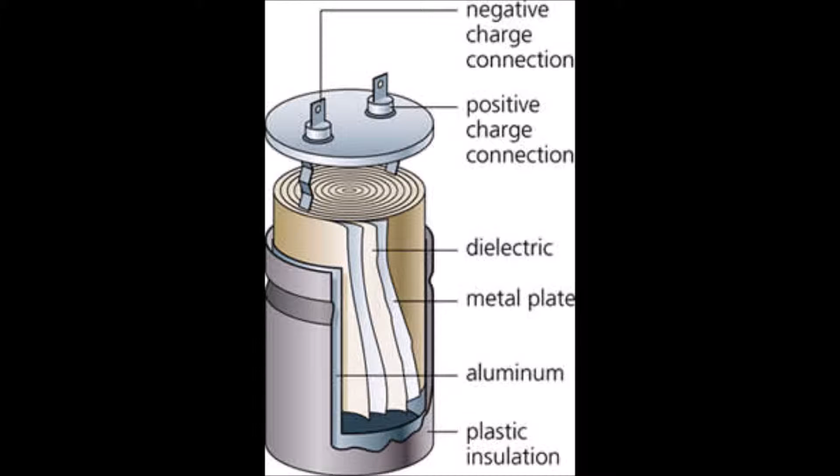Capacitors, the electrostatic battery. Capacitors store energy in an electrostatic field rather than in chemical form. They consist of two electrodes, plates of opposite polarity separated by a dielectric or electrolyte. The capacitor is charged by applying a voltage across the terminals, which causes positive and negative charge to migrate to the surface of the electrode of opposite polarity.

Heat, the thermal battery. There are two basic types of direct conversion thermal batteries: thermocouple batteries. The system is not energy efficient and is only suitable for low power applications.

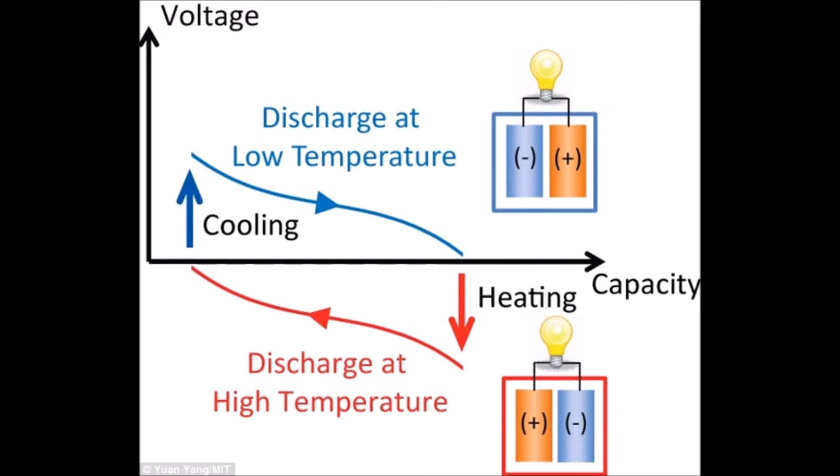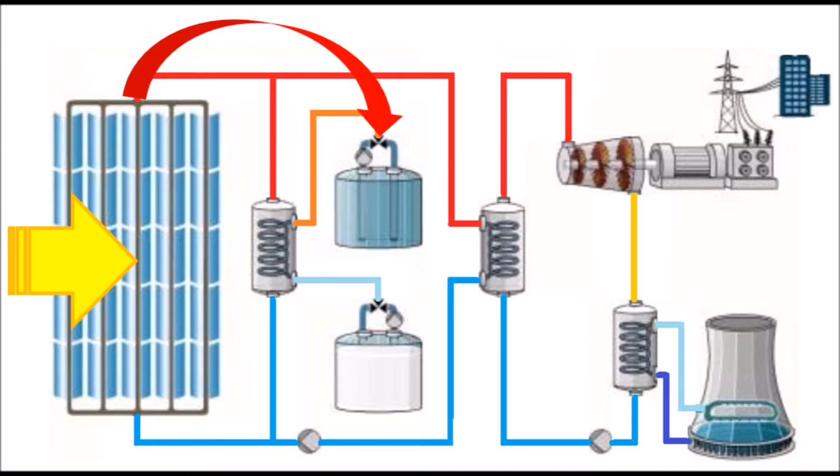AMTEC batteries, alkali metal thermal electric converter. They use a high temperature metallic vapor working fluid. A solid electrolyte separates the electron flow from the ion flow, which gives up its energy to the electrons passing through an external load. Energy conversion efficiency is about 4 times better than thermocouple batteries, which makes them more suitable for RTG batteries.

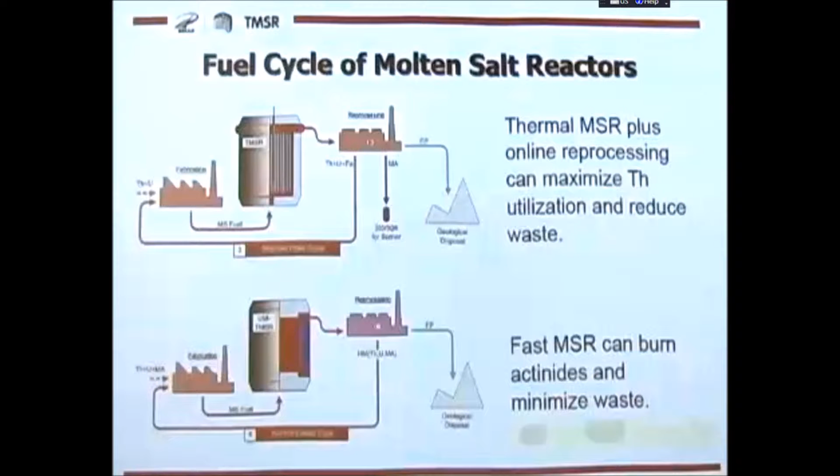Molten salt, a thermal battery. The molten salt battery is designed to capture thermal energy from thermal solar arrays and release it overnight when the sun is not shining, to generate steam for driving a conventional steam generator, and so maintain the energy supply to consumers. But today it doesn't get high uptake.

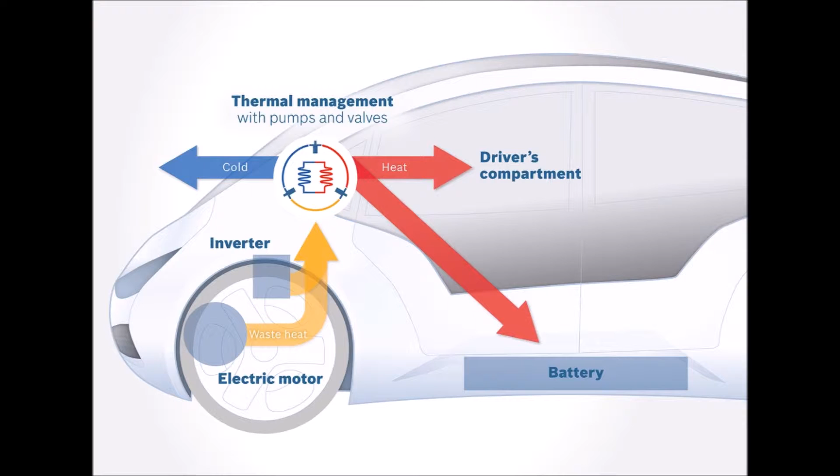Ice battery, a thermal battery. The ice battery is a load-shifting thermal energy storage application specifically designed for air conditioning systems, which stores cooling energy at night and delivers that energy the following day. It is a modification of a standard air conditioning system to extend its use to allow an alternative usage pattern, taking advantage of lower off-peak electricity rates during the night.

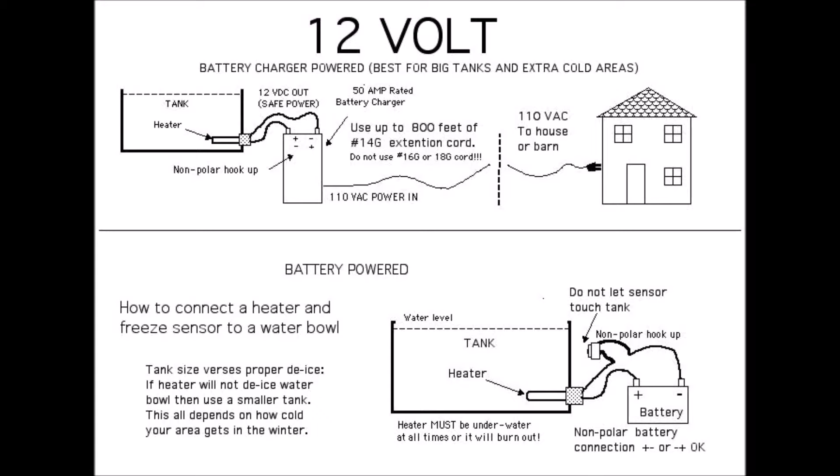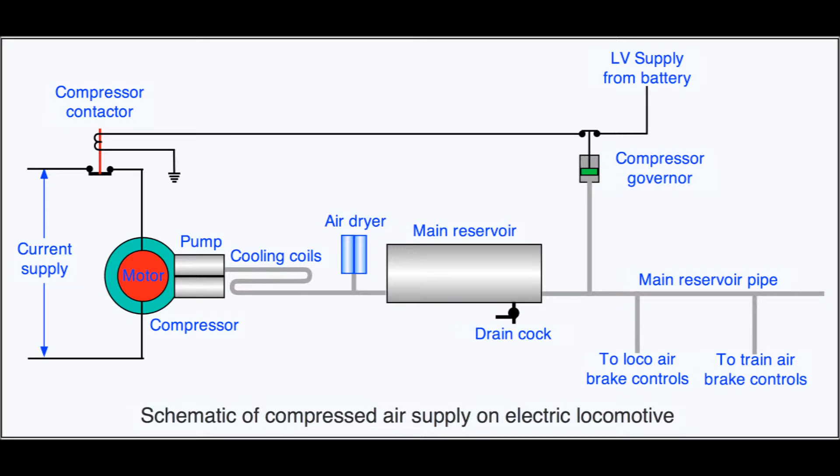Compressed air pneumatic battery. Compressed air energy storage (CAES) uses pressurized air as the energy storage medium. An electric motor driving a compressor is used to pressurize the storage reservoir using off-peak energy. During peak times, air is released from the reservoir and mixed with natural gas to drive a gas turbine generator to produce electrical energy.

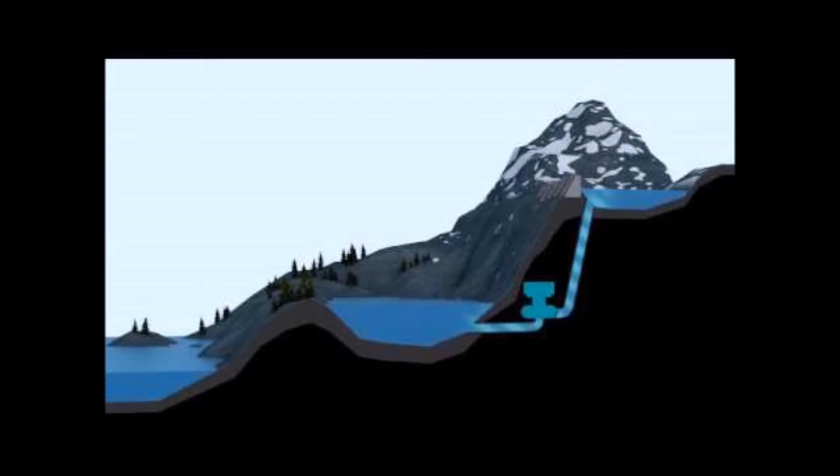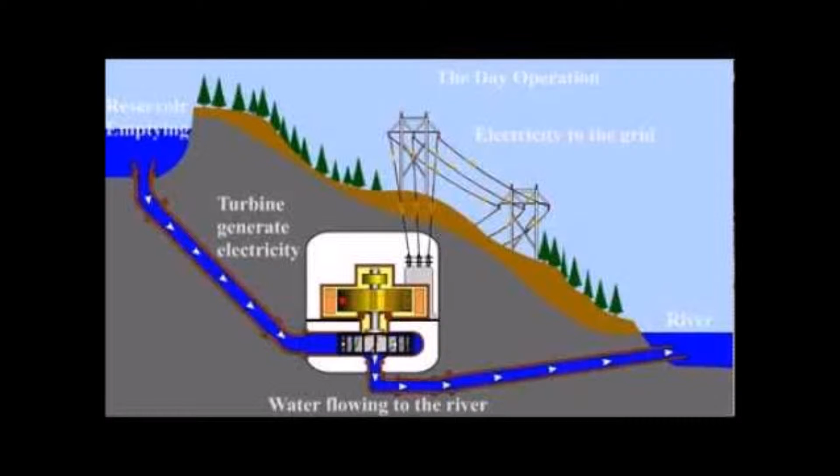Pump storage, the hydraulic battery. Pumped storage hydroelectricity is another relatively simple method of storing and producing large amounts of electricity to supply high peak demands. At times of low electric demand, excess electrical capacity is used to pump water into an elevated reservoir. When there is high demand, water is released back into the lower reservoir through the turbine, generating electricity. The round-trip efficiency loss is around 20 to 30%, so only about 70 to 80% of the electrical energy used to pump the water into the elevated reservoir can be regained in this process.

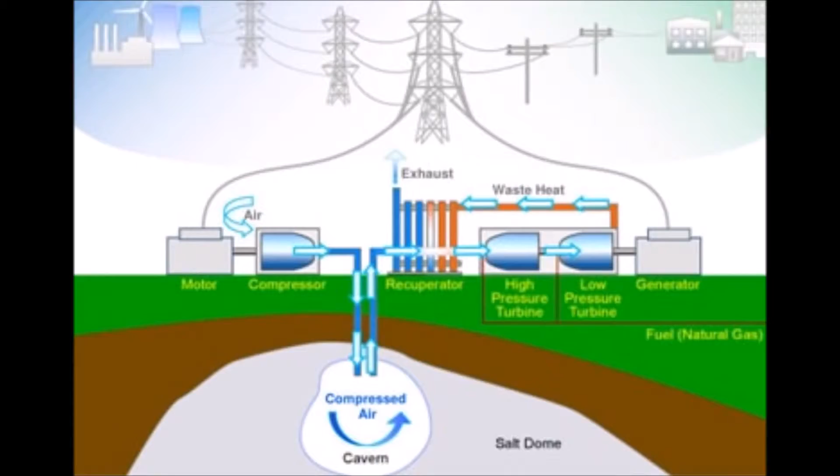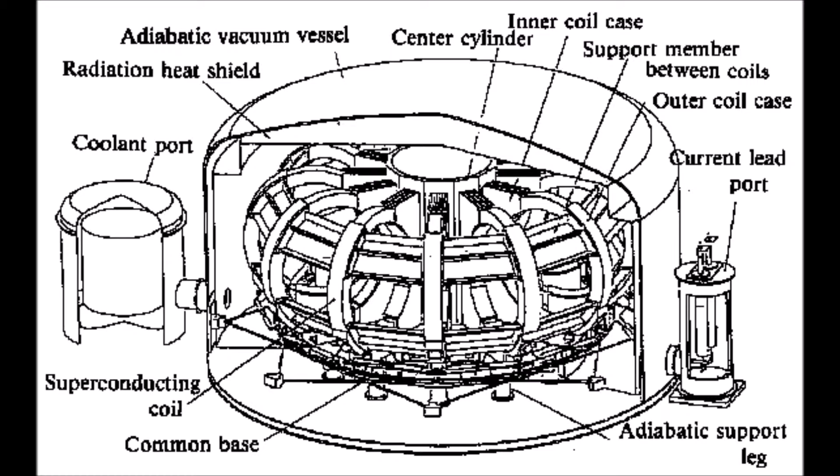Superconducting magnetic energy storage, SMES, the magnetic battery. Superconducting magnetic energy storage systems store energy in the field created by a direct current flowing in a large magnetic coil, cryogenically cooled to a temperature below its superconducting critical temperature, where electrical current flows without resistance or loss of energy.

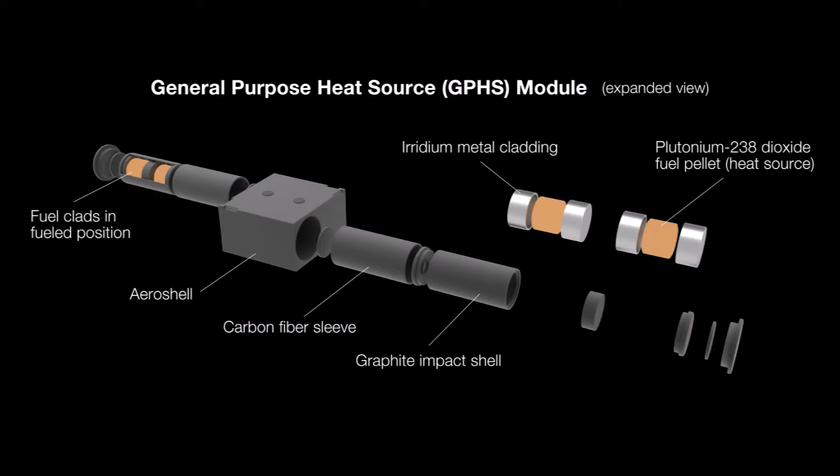Radioisotope thermoelectric generators, RTG, the nuclear battery. RTGs were designed for space applications and for providing power to remote installations such as lighthouses. These primary batteries are essentially nuclear-powered heat generators, which use energy emitted by the natural decay of radioactive isotopes of plutonium to provide heat, which in turn is used to generate electric power in a thermoelectric generator made from an array of thermocouples.

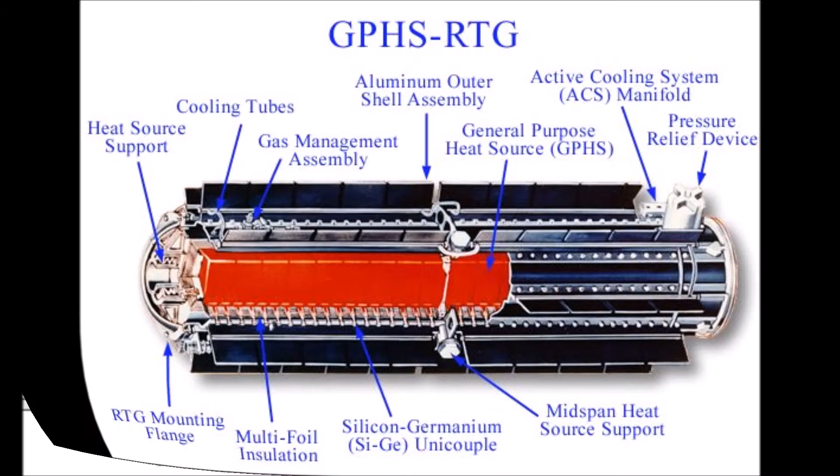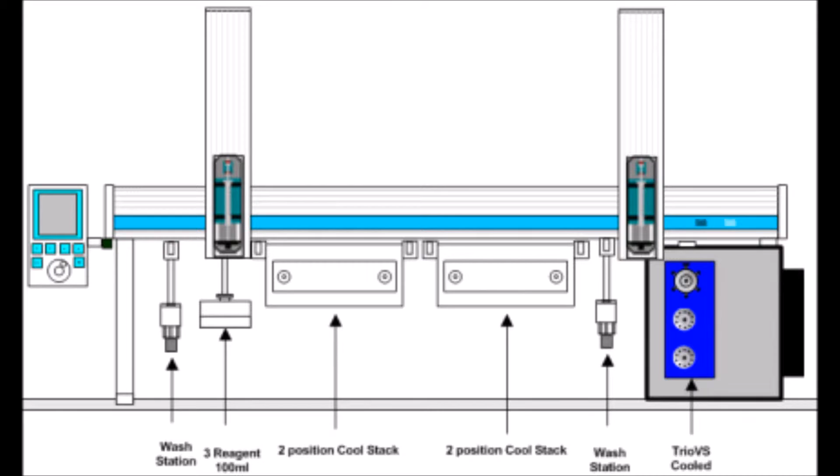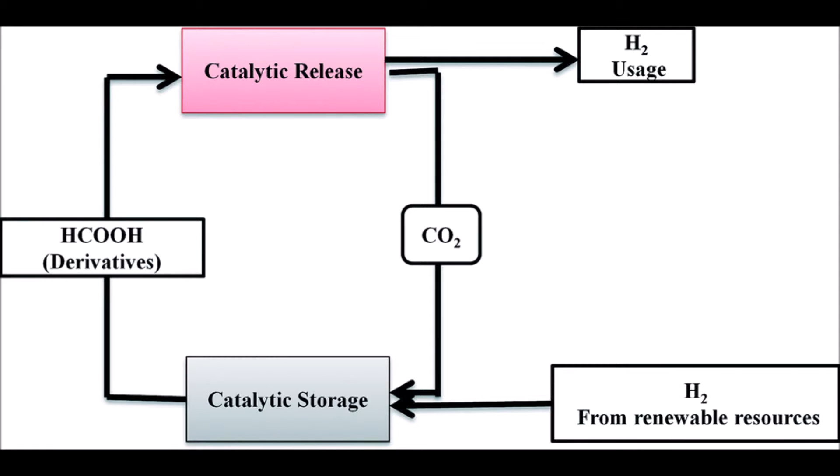Now, hydrogen storage. Electrolysis with fuel cells. Electricity can be converted into hydrogen by electrolysis of water. The hydrogen can then be stored and eventually re-electrified in fuel cells. The round-trip efficiency today is as low as 30 to 40%. Despite this low efficiency, interest in hydrogen energy storage is growing due to its high storage capacity.

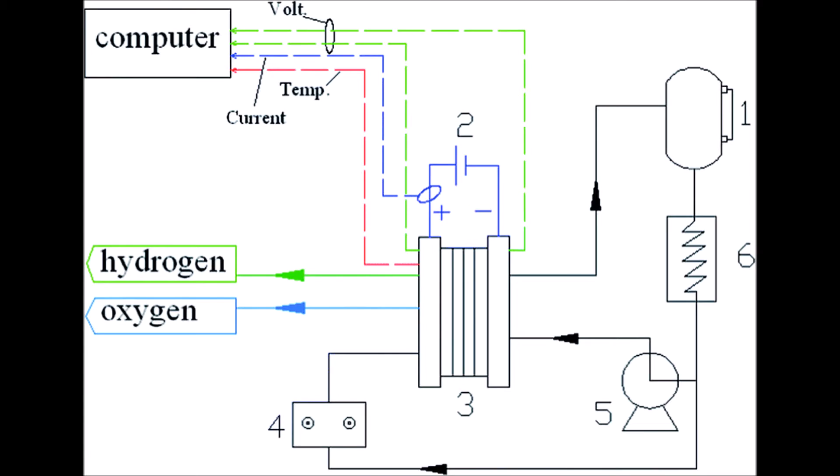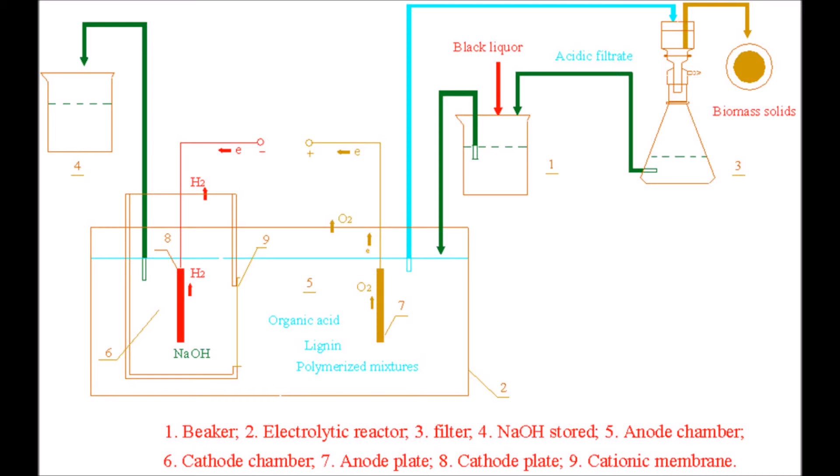Electrolysis. Water can be split into its component parts, hydrogen and oxygen, using proton exchange membrane technology, PEM. When a DC voltage is applied to the electrolysis cell, water molecules are oxidized at the anode, releasing oxygen and electrons, leaving protons, H+ hydrogen ions, in the remaining water. The protons pass through the PEM to the cathode, where they meet electrons from the external circuit, reducing the protons to hydrogen gas, which is released at the cathode.

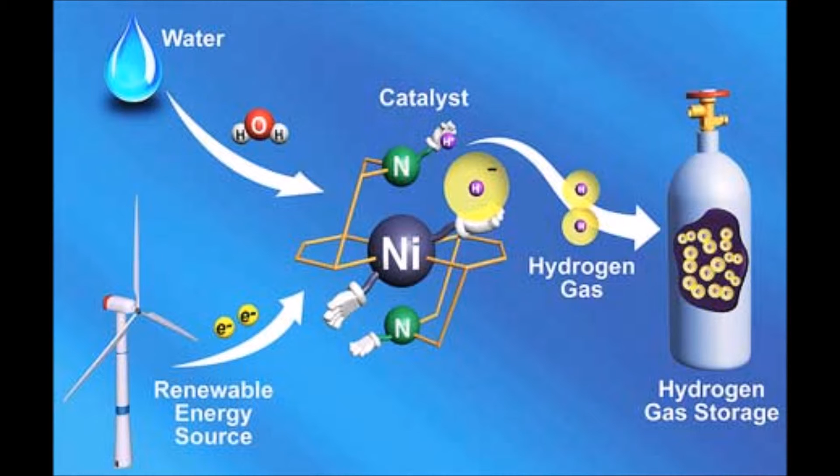Hydrogen storage. Small amounts of hydrogen, up to a few MWh, can be stored in pressurized vessels at 100-300 bar, or liquefied at 20.3 Kelvin. Alternatively, solid metal hydrides or nanotubes can store hydrogen with a very high density.

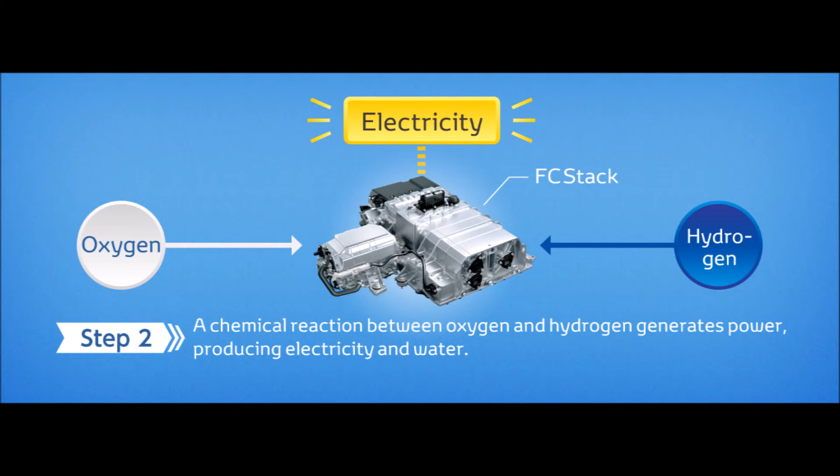Very large amounts of hydrogen can be stored in man-made underground salt caverns of up to 500,000 cubic meters at 200 bar, corresponding to a storage capacity of 167 GWh hydrogen, 100 GWh electricity.

Hydrogen re-electrification. Hydrogen can be re-electrified in fuel cells with efficiencies up to 60%, or alternatively burned in a combined cycle gas power plant.